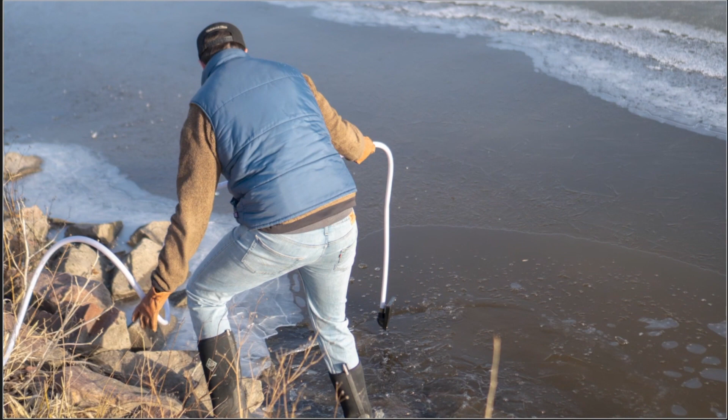Water testing is a big goal of ours, so we work with the state of South Dakota to actually test water and collect samples to help provide data to see what's wrong with the river and how we can fix it. We also want to be an educational resource, bringing awareness to the community about what's happened to the river and what we can do together to fix it.

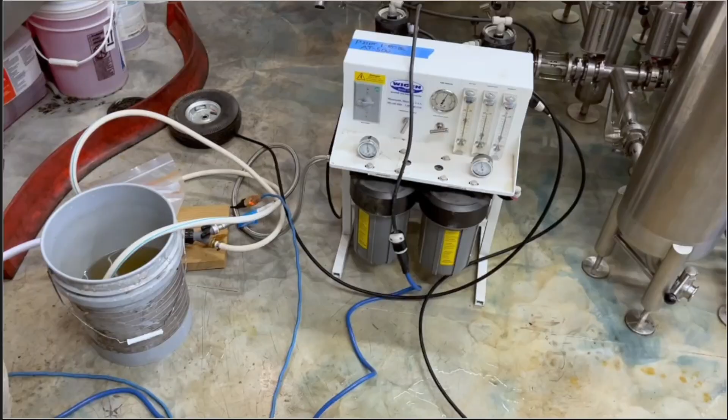We've been working with local breweries to use Big Sioux River surface water, clean it, and brew with that cleaned water. What we're trying to do is showcase how water impacts everyday life and what it takes to clean the water to get it to a point where we can consume it.

I've had this dream since we opened up about wanting to brew a beer with the Big Sioux River water. One of the things we're concerned about as a brewery is access to clean, potable water in the future. And I think everybody, because of technology and how easy it is for us to just turn on a tap and typically have clean water, we just think that that happens.

People are kind of removed from what actually goes into cleaning that up. So for us, that combination where we both had the same goal about raising awareness about keeping water and access to water clean, it was a no-brainer.

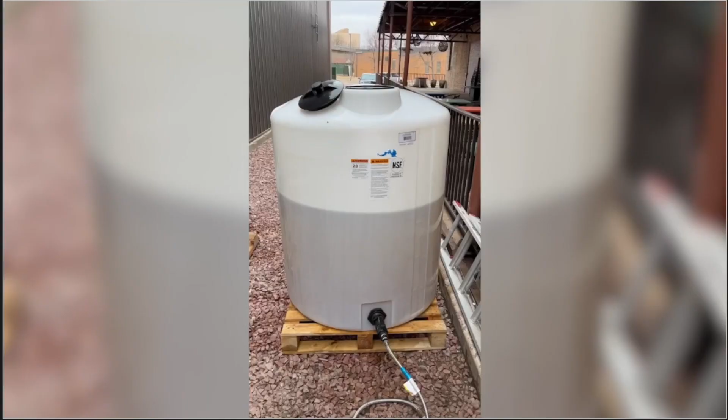Really, the goal of Big Sioux Brew was to shock and awe everyone. If you imagine getting a beer and say, hey, we made this beer out of Big Sioux River water, the first instinct is for you to go, ew, no. We want that reaction. We want everybody to say, oh my gosh, and then react.

That means that we're going to be talking about the river. We're going to talk about water quality. So that's really the main goal of Big Sioux Brew, which has really been successful.

Getting involved with Friends of the Big Sioux River, there are multiple opportunities available. We do cleanup events throughout the summer months, out there picking up trash along the banks of the Big Sioux River. A lot of the community loves this way of giving back to the river because you get down into the muck and pull out trash, and you can physically see what you're taking out.

In addition to that, we do water testing throughout the year, so volunteers wanting to help out are welcome. But at the end of the day, a lot of our actions are grassroots. Really starting to bring that conversation to the elected officials, to decision makers, to business owners, to really move that momentum forward, because this is an important process, an important resource in our community that's worth protecting.

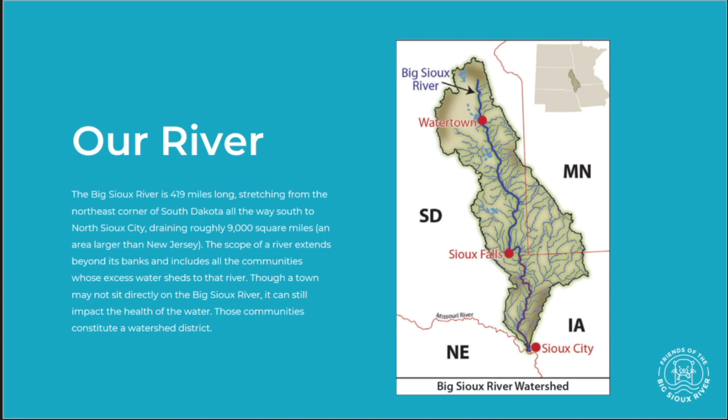Moving on to water testing, Travis alluded to this a little bit. One of our major goals for this organization is to make sure that we're using fact-based information so that we understand what the problem is, so that we can get a better solution on how to fix the problem and work with partners and the community on how to move in that direction.

One of the things we do here at Friends of the Big Sioux is a lot of water testing along that watershed. What are we testing for? Well, we're testing for three primary components: E. coli, total suspended solids, and nitrates. We'll talk a little more about those later in the program, but those are the three things we're testing.

We collect nearly over 500 samples throughout the watershed during the spring and summer months. It's important that we're spanning over 100 miles, from Dell Rapids all the way down to Akron, going out there by Lake Alvin, all those great places.

If anybody's interested in running that route, it's a really fun summer program to do, to go collect those water samples. And I say this every year, but I was out at Lake Alvin and found a 12-pack of Busch Light unopened. So, that was going to the same 12-pack of Busch Light. I'm not promising it happens every time, but at least once, I'm sure it will.

Moving on, we do a lot of water testing, and it's really important. We follow the South Dakota Volunteer Water Quality Monitoring Program because we want all of our data to get incorporated with the rest of the data that the state of South Dakota is pulling together. The reason that's important is the more data we have, the more we can make good, educated decisions as to whether or not we're improving, or if something is going awry related to the water and the river specifically.

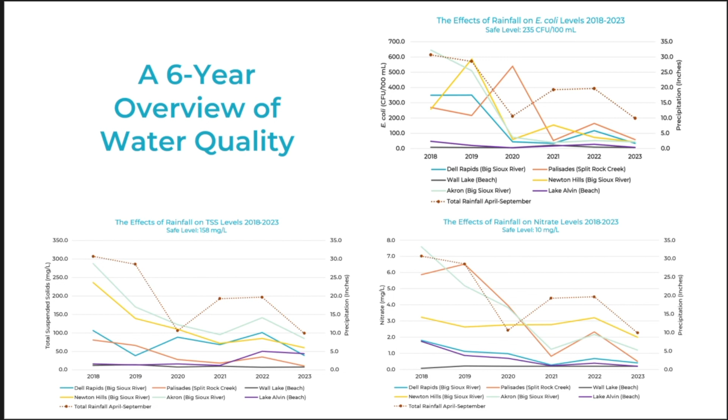Awesome. So let's do a little bit of education—there's a small test afterwards. I hope you guys all brought your number 2 pencils. It's just maybe 75, 80 questions or something like that.

But we're going to talk about impairment status. A lot of times, like we talked about a little bit in the video, one of my favorite things is to go talk to people about the Big Sioux, and you always get that immediate reaction: ew, it's a gross river, there's something wrong, it's toxic. You hear that a lot. Well, let's make sure we're educated on what we're doing here.

The integrated report for surface water quality is a very thorough report produced every 2 years by the South Dakota Department of Ag and Natural Resources. It's a statewide water quality assessment of all the lakes and streams in South Dakota, and at that point, they're looking at designated beneficial use standards.

The EPA requires all states to specify goals and expectations for how each water body is being used. That makes sense, right? If we're going to swim in the water, it should have a specific water quality that it needs to hit. If we're using that water to feed animals or irrigate fields, those are different water quality standards that we have to hit.

For example, if it's a domestic water supply, which the Big Sioux River is in some pieces of it, immersion recreation, limited contact recreation, fish life propagation - any of those things that we want to use the river for - there are certain water quality standards that we want to hit for that.

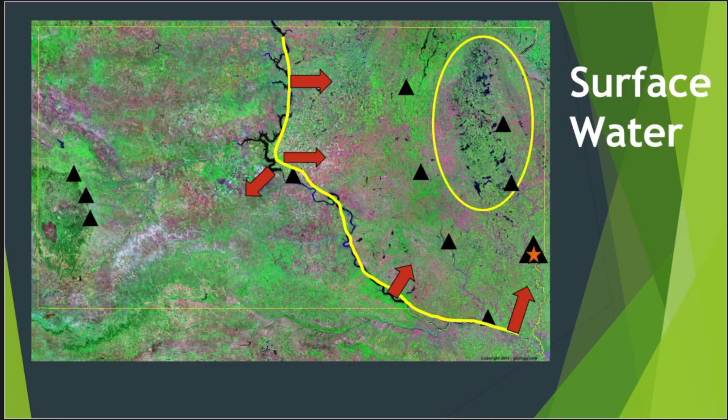Prior to the advent of Lewis and Clark, about 11 years ago, it was part of a two-legged stool — the river or the shallow aquifers in the area along the river and along Skunk Creek. Now we draw from all three. But the river is the least used resource. It's currently providing the least amount of water to the system, but it's still necessary and important because the others aren't going to get any bigger anytime soon.

Groundwater in South Dakota — the geologist gave me 28 slides. No, there are a lot of slides. I'm going to go through this real quick.

Basically, east of the river, it's glacial sand and gravel that hold the water. They're hard to find, and we spend a lot of time looking for them. If you go west of the river, into the Black Hills area and everywhere in between, the aquifers are basically big flat layers of rock that, if you know where you are relative to them, it's very easy to figure out how far down you have to drill. What you get isn't always the greatest stuff, but it works out pretty well. In the glaciated areas, the stuff is scattered all over the place, and we have to spend a lot of time looking for it and trying to suss out where it might be.

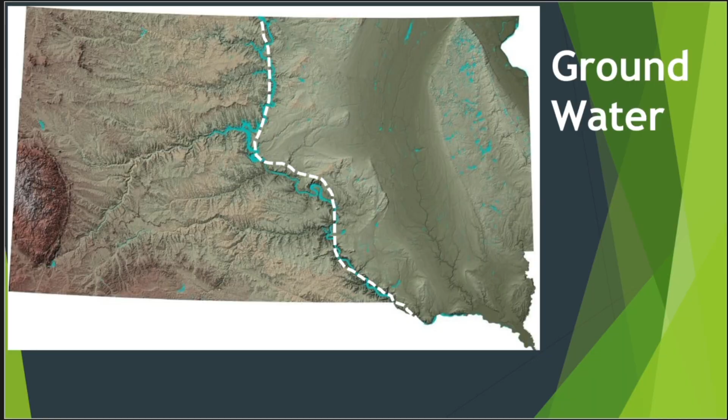I've got an image later on — I just gave this little speech here. This is the West River stuff. Most everything is layers, so if you know your elevation and the elevation of the target, you can drill a hole X number of feet deep, and 99 times out of 100 you're going to hit it.

Around the hills, a lot of that water's not bad. You get away from the hills, and it's been in the ground a very long time — it's picked up a lot of stuff, and it's yuck. That's a geology term. This is a dated picture, because the flaming fountain in Pierre was flaming at this time — that's the infamous flaming fountain there in Pierre, a well in the Dakota Formation.

In addition to having water pouring out of the ground, it's under artesian head conditions. It was full of natural gas and actually heated the capitol for a number of years. It appears that we finally depleted the gas supply, and this well is in the process of being decommissioned because it's an absolute nightmare from a safety standpoint.

The water in the ground is wet, that's about all you can say for it. And if you have nothing else, there are Dakota artesian wells all the way, pushing almost to the I-29 corridor. Because if there wasn't anything else, everybody knew if you drill down deep enough, you get the artesian and up it'll come and you make do.

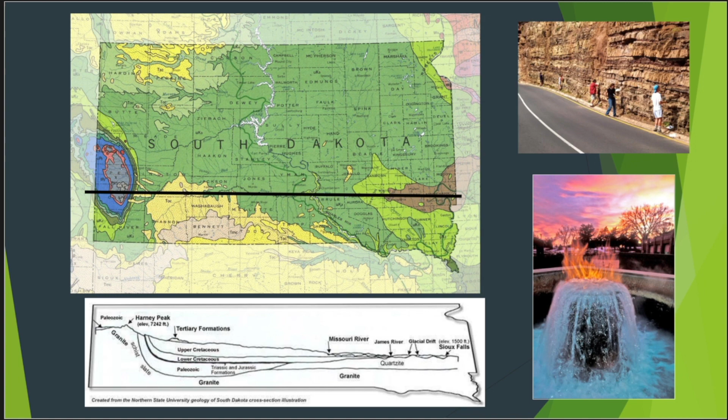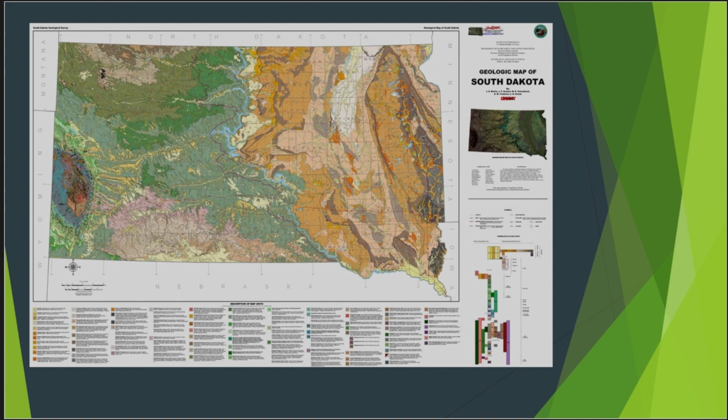As I said, eastern side of the state, our side of the Missouri River, all the oranges and different colors, those are the glacial sediments. We like to draw a lot of different maps and use different colors, so it's real busy that way. Most of the water sits in what we call glacial outwash, sands and gravel deposits left behind when the glaciers retreated during their numerous visits to South Dakota over the various years.

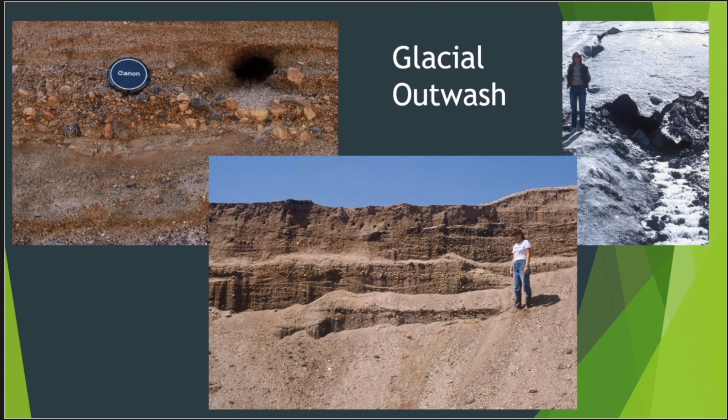You can put a lot of water in the spaces between the little pebbles and sand grains, and that's what we've got. As I mentioned earlier, though, they don't follow any kind of a pattern unless you've been looking for them a very long time, and then I'm only slightly better than anybody in the room at predicting where they're going to be. And so what we end up doing is having to go out and drill holes, lots and lots and lots of holes.

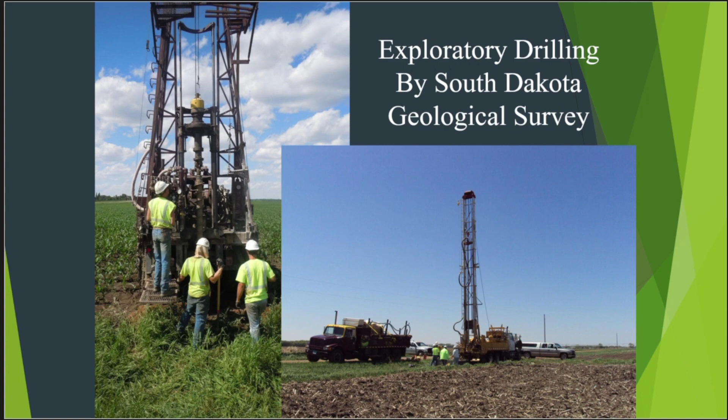It's easy to see the stuff on the surface because it's on the surface. We've got up to 1,000 feet of glacial sediment in some places in the state. We have no idea what's down there until we drill holes. And these are some of the holes being drilled. And there's a map of the whole list from just 4 years ago.

There's a lot of teeny little green dots. And hopefully what you may pick out is that a lot of them, particularly on the eastern side of the river, well really everywhere, are in a regular grid, right? North, south, east, west lines. That was intentional. These were holes drilled to find out what is down there, systematically going around, punching a hole, then punching another hole on a grid. We weren't looking for anything in particular, we wanted to find whatever was down there.

And so we've actually got a tremendous database of what's going on. Of course, when I get a request for information about a particular spot, the nearest hole is 2 miles that way and 3 miles over there. That's just the way it works. We could always do more. What that has led to, for certainly much of eastern South Dakota, where we can just take an initial shot, are maps that provide information on where aquifers might be.

This is the map called the First Occurrence Map for Minnehaha County. Any of the colored shaded areas, the oranges and the yellows, are surficial sands and gravels. Yellow's alluvium, the outwash is more of the orange. You can follow the Big Sioux River down around, loops through Sioux Falls, drops out to Brandon, and heads farther south.

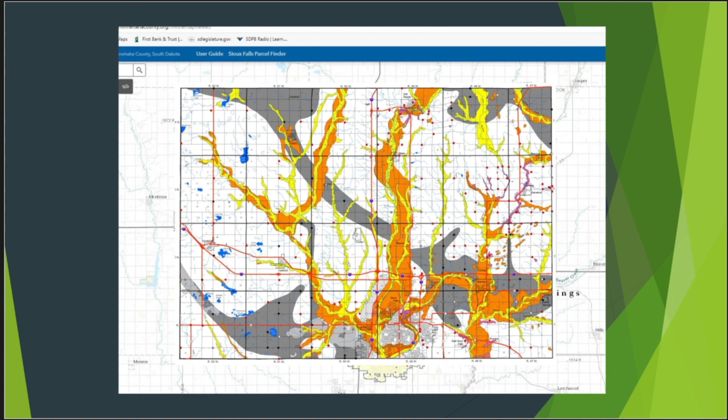The gray colored units are buried aquifer materials. They're not exposed at the surface, but they've been identified through all that systematic drilling and poking around. And the areas in white are ones where there's basically nothing in the first 100 feet. And in Minnehaha County, there aren't many places where if you go over 100 feet, you aren't going to hit quartzite. And the quartzite is kind of a mixed bag as far as aquifers go. But this is at least an effort to look at what's going on and see what's out there.

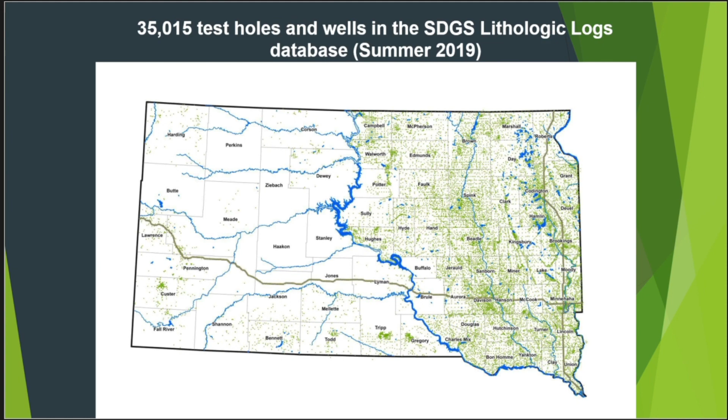Think of your city water distribution system. They've got a single source and run pipes to every house. These were folks that would set up and identify a well field somewhere and run pipes to all the farms in the county or a multi-county area. So instead of having 20 or 100 feet between homes, you might have a mile, but there you go. Take the water from where it is, ship it off to where people want it.

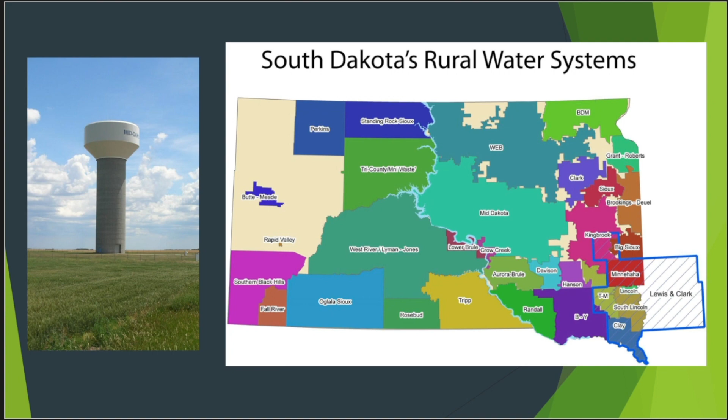These systems have built out, and down here in the lower corner, the hatched area is the rough service area for the Lewis and Clark pipeline, which I'm not going to talk about because that's a story for another time. Now, what's coming or what's here already? We have gone from little farms and little towns and single houses to big, giant farms and big business and tremendous demand.

Ethanol plants or similar ag processing facilities - let's obviously put this together. Wholestone is still a potential thing here in Sioux Falls, along with big developments. Sioux Falls doesn't add 20 people a year, they add 5,000. That's a new legislative district every 4 years. That's a lot of demand - the likes of which, again, we don't have little beaches, we have water parks. Demand at a level we have not ever seen before, and frankly aren't really prepared to deal with at this point in time.

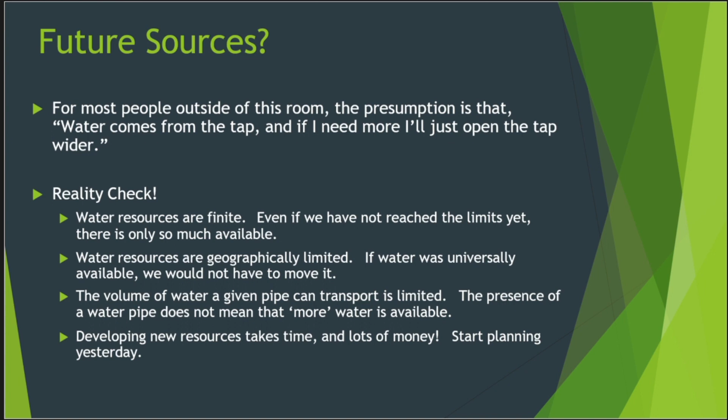First up, what do we need to protect what we have? Up and down the Big Sioux River Basin, local county governments - Minnehaha, Lincoln, Union, Moody, Lake, Brookings, a whole bunch - have all adopted what fall under various names as groundwater protection ordinances. Our surface water, the aquifers that we use, are at land surface for the most part. So if something happens at land surface that's bad for the water, it's in the water.

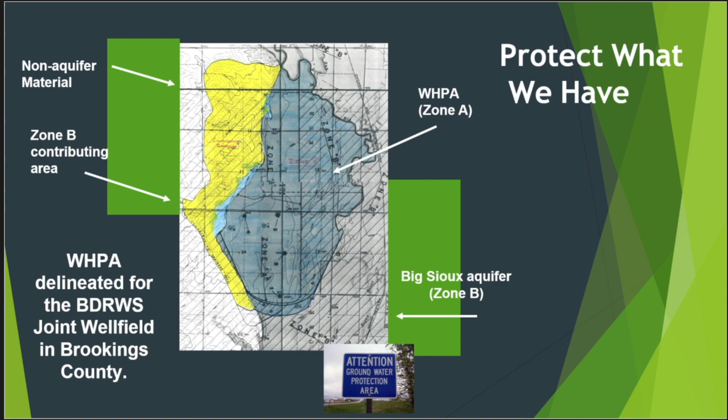And that's really critical because that's where our water is coming from. In recognition of this, there are land use limits in place from Summit all the way down to Cook Lake that limit what can be done over the shallow aquifer. These have been in place since the early 90s, for the most part 1989 - Brookings County did it first. This is huge, not something you can find in many places around the country, and it makes a big difference.

In most counties - this is a little chunk of Deuel County to the north - the shallow aquifer is any of the stuff that's colored in yellow. There's an awful lot of not-yellow, not-colored area in Deuel County. If you need to do something that's not necessarily safe, there are lots of places you can do that, that aren't over the aquifer. You know, want to build a new chemical processing plant, pick a spot in the white somewhere and you're fine. You're not going to hurt anybody, at least as far as shallow aquifers are concerned.

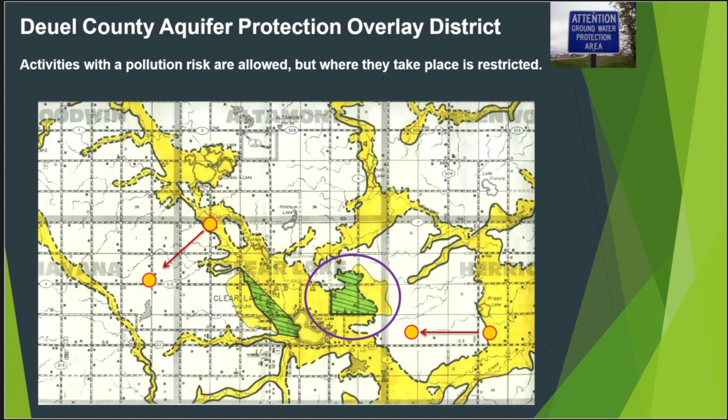It was pretty clear that that green hatched area there, surrounded by the circle - if you do not have your own well in Deuel County, that is where your water comes from. That is the sole source of publicly supplied water in the whole of Deuel County. There is no place in Deuel County you want to spend more time protecting than that. The flip side is, you can pretty much let everything else go to hell.

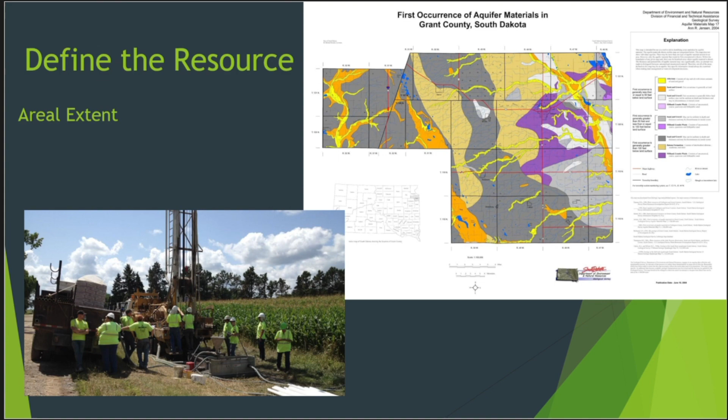So, protection - we need to do a better job of finding the resource. Even with 35,000 little green dots on that map, we need to know more. We need to get out there, and we need to refine some of the lines on these maps to a greater degree. This goes for water quantity as well - get a better handle on that.

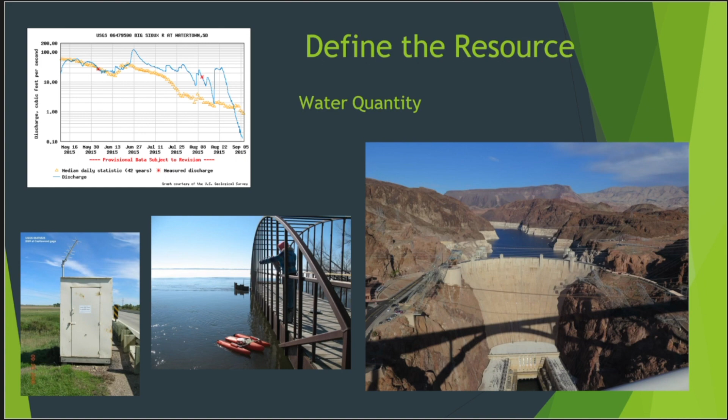Water quality - Rachel and Emily mentioned ongoing efforts to monitor water quality, both surface water and groundwater, underway and conducted by the state, by Friends of the Big Sioux, by my organization, to get a better handle on what's out there, what the problems might be, and what we can do to protect it.

Oh, I did not come through at all. Well, we'll skip that one.

There's a huge network of surface water monitoring sites, and a network of about 150 monitoring wells that look at groundwater resources across the state. For some reason, this image didn't translate very well in the PDF version, so we'll have to fix that and show it to you later. But anyway, there's a lot of information going on there as well.

Directed development is another option that probably needs to be pursued. Unfortunately, everybody wants to come live in Sioux Falls, so they want to have their business in Sioux Falls, and they want to have a zillion gallons of water. And nobody wants to be told to move to Chamberlain for some reason, for the water.

Obviously, the spot I'm standing on here, where should we go? Death Valley, yeah, up there. Not if you're a water-intensive business—this is a really bad place to be.

Now everybody laughs, but you'd be surprised how many times somebody's come in and said, yeah, we drilled a well and didn't find anything. Oh well, okay, you've got to move so many miles away, and there probably might be a well there. How about we move 200 feet?

They'd already built the building, which was going to hold a giant fish tank to grow tilapia, the little fish. What do you need to grow fish? Water. Did they have water? No—building in Death Valley. Let's avoid that if we can.

Again, you've got a bit of an aquifer map. If you're going to build up in Grant County, the darker colors tend to mean less water. Let's build there if we want to stay away from water. Go to the lighter, warmer colors if you need water. Don't just pick the spot that works best for some other reason.

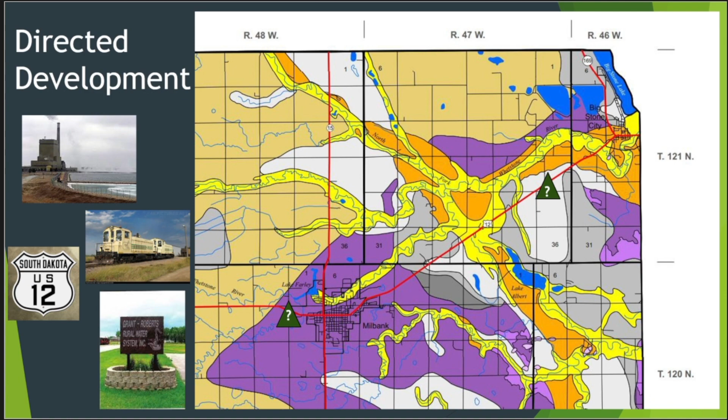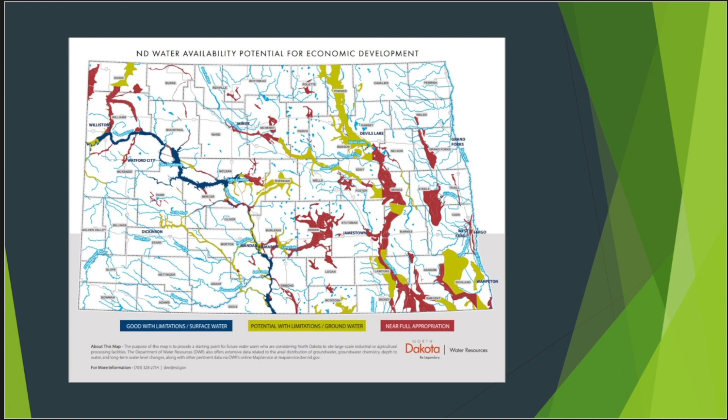North Dakota has done a little bit of work in this regard. The colors on the map basically show: if it's green or blue, there's plenty of water available. If it's yellow, it's kind of limited. And red is like, yeah, no, don't bother—there's nothing there left over. We can put some maps like this together for South Dakota.

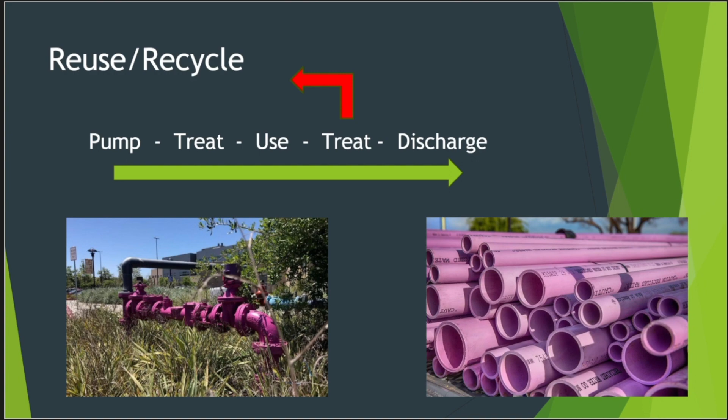New addition—we can reuse our water. It doesn't necessarily have to be cleaned right back to Perrier-level distilled water cleanliness for certain activities. This is actually something that Mark Potter, the Public Works Director, mentioned to me the other day.

They could send some of that mostly clean water across the interstate and water the grass rather than pump treated water for that use. It doesn't work for everything, but it's a way to lessen the demand on new water.

If you can recycle, thought I had a—no. Yeah, I'm no good at this. Yeah, but that red arrow would work.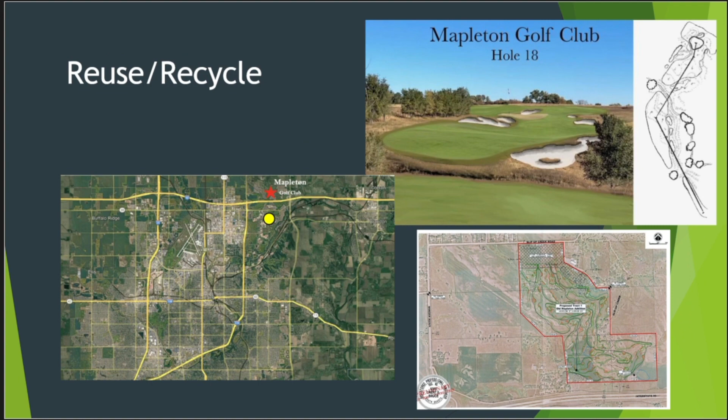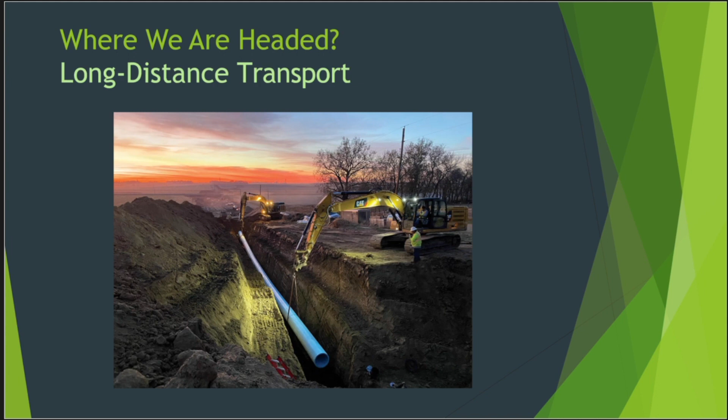Okay, lastly, those are all options that are out there and available, but in reality, where are we headed? We're headed toward this—a picture of the Lewis and Clark pipeline. It's not a Terry Redlin print, although I think it sure looked like one at the time. It's big regional long-distance transport. If you can't bring Mohammed to the mountain, you have to bring the mountain to Mohammed.

So if we need water, the only place to go look in huge quantities is the Missouri. That's where the water sits, and it's a long ways from where we are.

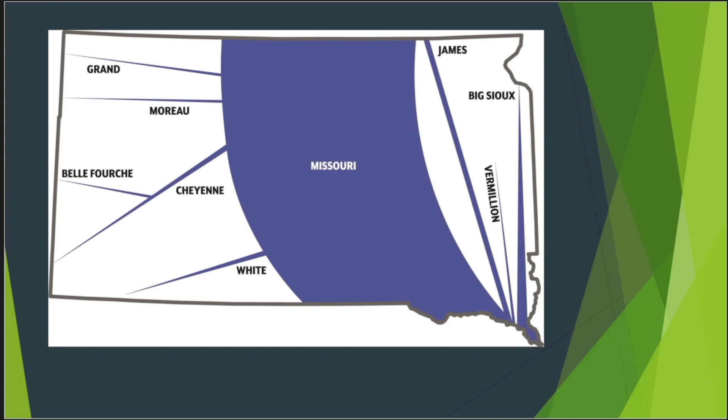There are a lot of folks already using it, but we're using a relatively modest amount. These are just the reserves that are in place. You've got Lewis and Clark semi-up to date—about 350,000 acre feet is what's really out there in terms of reservations.

By comparison, last winter, early January, down in Yankton, 14 million acre feet of water was running by the area. Everything that we have in reserve, and we have huge reserves, is barely a single-digit percentage of what's out there. There's plenty of water in the Missouri that we can tap into—we just have to figure out how to move it.

And with that, I'm going to pass it over to my colleague, Larson, who's going to talk about ways to move it. We're both going to have questions later, and he's going to do this for you.

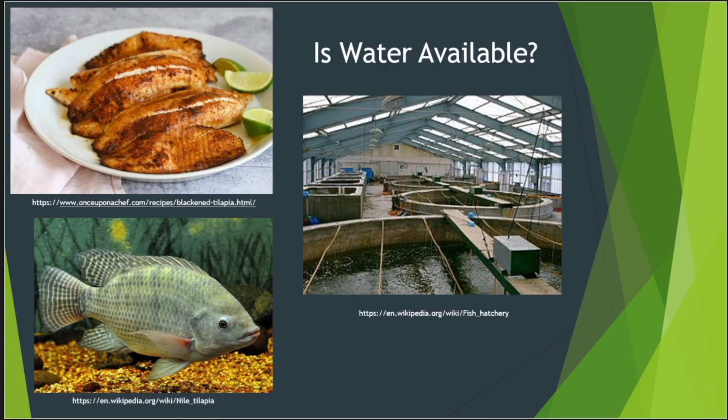Lewis and Clark Regional Water System - some of you may not have heard of this, so let me provide a little background. Lewis and Clark is a regional water system that includes 20 cities and rural water systems. All said, hey, we all are going to have future water needs. Let's join together. Instead of each of us doing our own thing, let's band together to solve our common water problems.

So in South Dakota, there are 11 members, Minnesota 4, Iowa 5. Some of our members like Tea, Harrisburg, Parker, Lennox, Beresford, Centerville, are sole source members. That means the only source of water they have is Lewis and Clark. Other members like Sioux Falls, it's a supplemental source of water. So roughly 50% of Sioux Falls' water comes from Lewis and Clark.

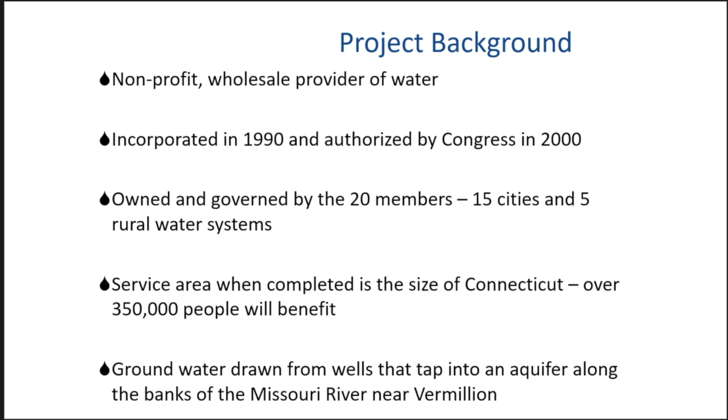Groundwater is drawn from a series of wells that tap into an aquifer along the banks of the Missouri near Vermillion. Something unique is the Bureau of Reclamation is the funding agency for Lewis and Clark. They only operate in the 17 most western states - they don't go into Minnesota and Iowa. So this is a very unique opportunity for the states of Minnesota and Iowa to benefit from a Bureau of Reclamation project.

The Bureau of Reclamation provides oversight with regard to construction, but they don't have anything to do with operation and maintenance. We are totally self-sufficient in terms of water rates covering our O&M. Construction funding is 80% federal, 10% from the 3 states, and 10% from the 20 members.

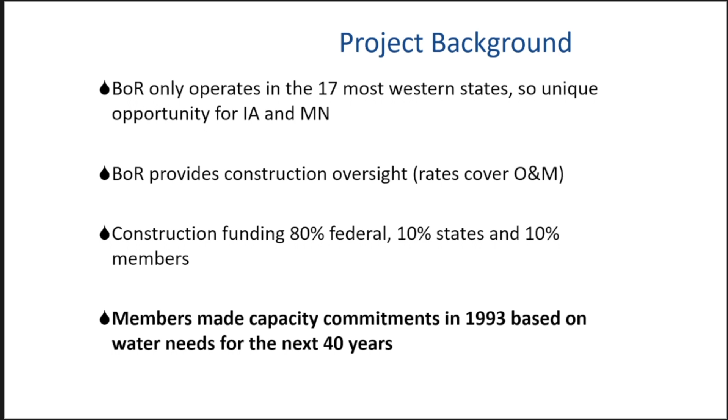This is an important point to make - the members had to make their request for water back in '93. They had to look ahead and say, for the next 40 years until 2033, what do you think you're going to need? That's what Lewis and Clark was designed for. That's important because 2033 is going to be here before you know it. So Lewis and Clark was never intended to be a 100-year solution for members.

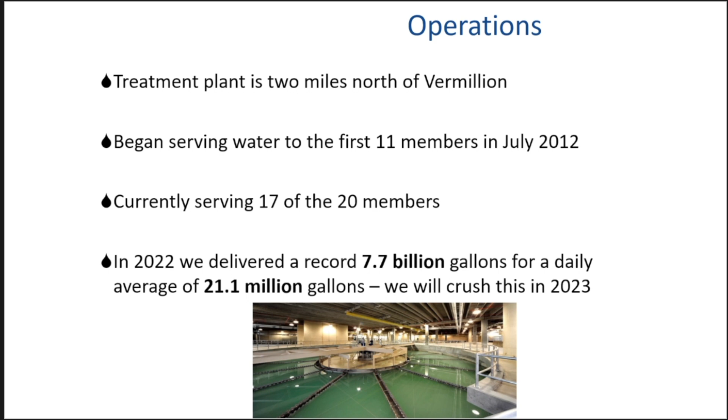In terms of operations, our treatment plant is 2 miles north of Vermillion. We began serving water to our first 11 members in July 2012. We are currently serving 17 of our 20 members. In 2022, we delivered 7.7 billion gallons, an average of 21.1 million gallons. We're going to crush that in 2023 because we've added more members, and Sioux Falls is also using Lewis and Clark to a higher degree.

In terms of construction, I want to define some terms. I'm going to use the term 'base system' a fair amount, and that is what was authorized by Congress - that's 44 million gallons, in rounding numbers. We are currently working on an expansion of the system up to 60 million gallons a day, and as Jay indicated, that's the maximum that our pipes can handle.

And then we're also looking at a possible second expansion. What do we need beyond the 60 million gallons a day? Do we need parallel pipelines? How can we address the needs for the next 40, 50 years?

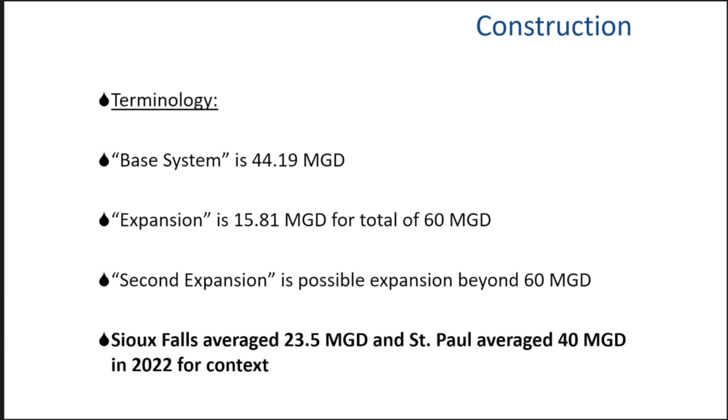Sioux Falls, just to put it in comparison or context, averaged 23.5 million gallons a day last year. St. Paul averaged 40 million gallons a day. I put that in context because if I just say 60 million gallons a day, that doesn't mean anything to you. So I'm trying to help you understand what 60 million gallons a day means compared to, for example, Sioux Falls and the city of St. Paul.

The state of South Dakota recently approved additional groundwater rights for us. We have to get groundwater rights from the state of South Dakota—it's the Missouri Elk Point Aquifer. We recently requested another water right for an additional 17 million gallons. That needs to go to the legislature this session because it exceeds 10,000 acre feet. 17 million gallons equals about 19,000 acre feet, so anything over 10,000 needs legislative approval.

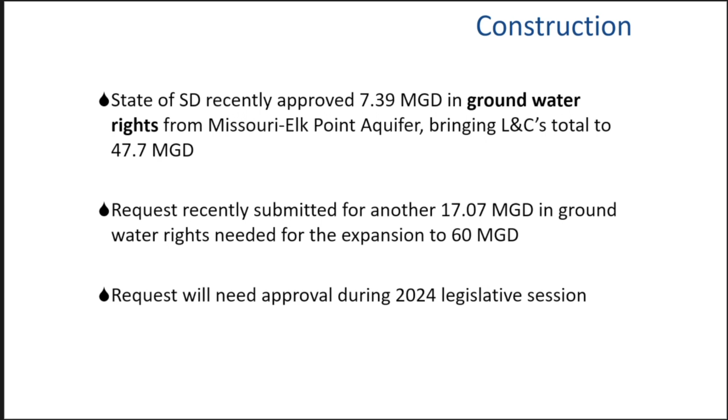Coincidentally, the last time the legislature had to act on a request like this was from Lewis and Clark in 1994. So here we are 30 years later coming back, and I'm glad Senator Jim Bolin is here—I had a chance to visit with him before the program started about this. It'll be a concurrent resolution, not even a bill, that the legislature has to give their stamp of approval on before we can get this water. Jim's been a huge supporter of Lewis and Clark through the years, and this will be his final session, so I want to give him a shout out before he retires. Jim, thanks for your service.

The base system construction started in 2004. We're 95% complete. Sheldon, Iowa is going to be connected by the end of this month. Madison in the summer of 2024. Sibley in the summer of 2025, and then we need to complete an expansion of our treatment plant. So about 2026 is when we expect the base system will be completed.

Last year, we started expanding our system. We're not even done with the base system, and we're already expanding it. Some members aren't even getting any water yet, and we're already expanding. That's primarily because of the drought. A few years ago, I would have said the expansion is 15, 20 years off, but the members saw the handwriting on the wall—not only the drought, but growth and demand far exceeding what we can provide. So we started the expansion last year.

It won't be done until 2031. And it's not like if you get half of it done, you get half the capacity—it all has to be done. So in 2031, we'll see a bump in the members' reserve capacity.

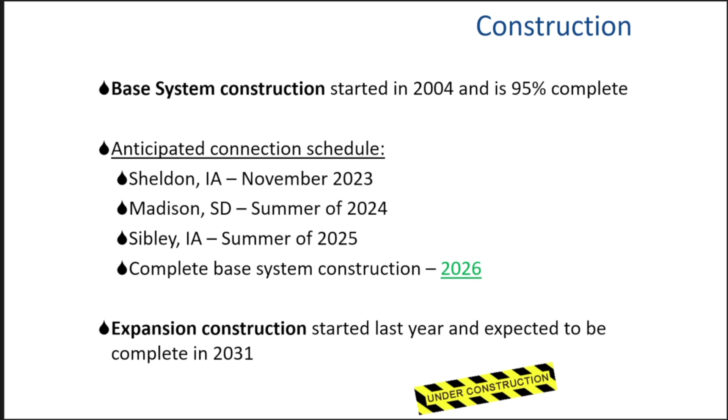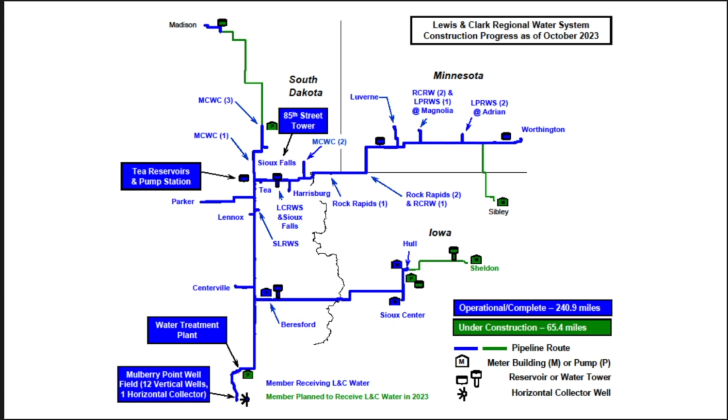This is the footprint of Lewis and Clark. Everything in blue is currently operational. Green is where we're constructing, so we're getting toward the end of the project in terms of pipeline. That's good news. Again, this is about the area the size of Connecticut, to put it in perspective.

In terms of construction, right now we have a record 18 construction contracts open, the most we've ever had. We only have 2 contracts left to complete the base system—that's the expansion of the treatment plant and a couple of backup generators. So we only have 2 left, we're getting close.

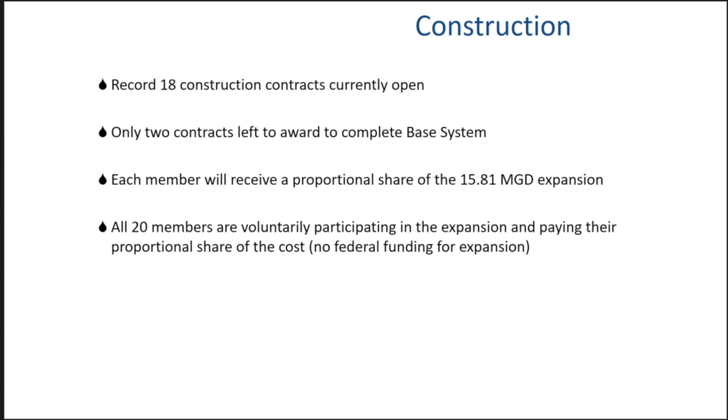Each member will receive a proportional share of that expansion. I mentioned the expansion to 60 million gallons a day—all 20 members voluntarily said that yes, we want to participate and pay for our share. There is no federal funding for the expansion. I talked about the federal funding that helped construct the base system, but there's no federal funding for the expansion.

I just want to go through some pictures here. Lime sludge is a byproduct of the treatment process—lime is used in the treatment of water, not the kind you put in a margarita, by the way. We currently have 3 lime drying beds, and we're adding 3 more. Lime, once it's dried, has many agricultural uses, so it's put on fields, etc.

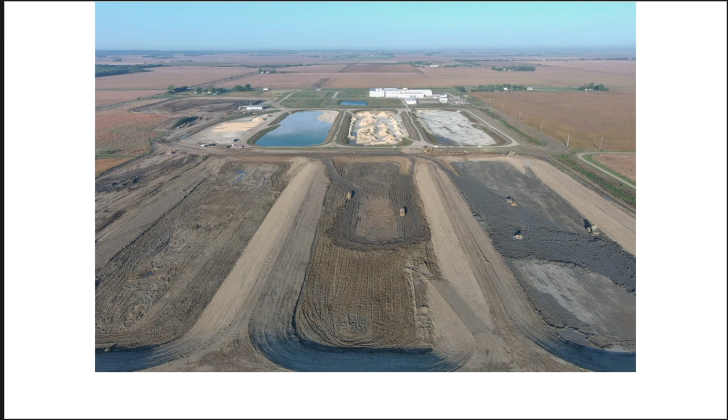Here's a picture of our treatment plant near Vermilion. Here is some of our 54-inch pipeline that went from the Missouri River up to our plant, about 9 miles of what we call raw water pipeline. This is the untreated water being brought to our plant.

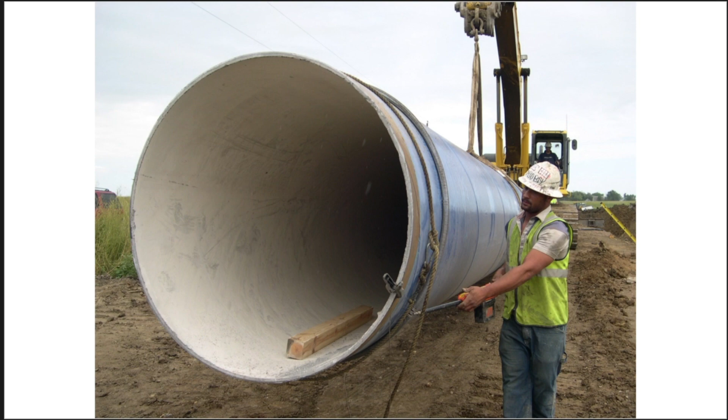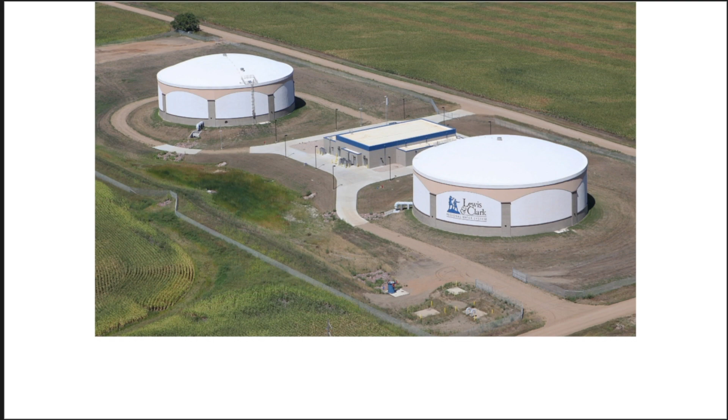Each of those reservoirs are 7.5 million gallons. We have a 3 million gallon water tower on the southern side of Sioux Falls. There's a story behind why that logo is so small. I'm not going to tell you the whole story, just to say you can't fight City Hall.

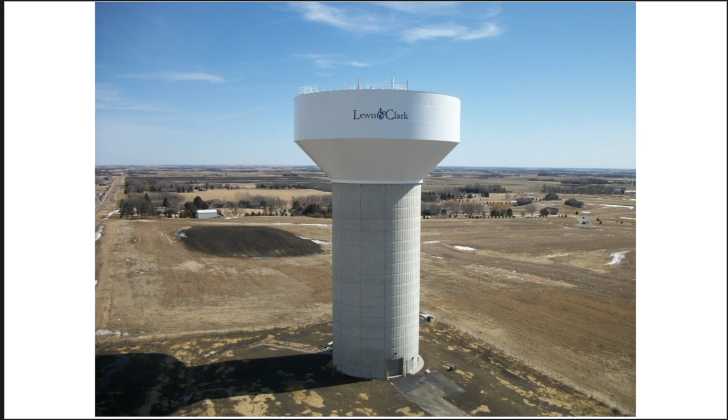In terms of funding, we need about $37 million to complete the base system. I finished this presentation a few weeks ago when I said I fully expect we're going to get that in FY24. I was a little optimistic. We're going to be about 11 million short, so we're going to have to go back to get a little more funding in FY25.

So I mentioned that the expansion is totally at the cost of the members. Thankfully, the states are helping a little bit. We are getting some ARPA funds. South Dakota, Iowa, state of Minnesota has approved some dollars to help bring down the cost of the expansion, because ultimately it's the ratepayers paying for this expansion. Everyone that buys water, you're the ones paying for this. And so we're thankful that the states came through with some money. Even so, the members still need to cover about $100 million toward that expansion to get to 60 million gallons a day. So it's a big cost.

So again, that gets us to 60 million gallons. What do we do beyond 60? Back in May of 2019, which was a record wet year - 2018 was record wet, only to be broken by 2019, even wetter - we started discussion about expanding Lewis and Clark, possibly doubling in size. The reason I point that out is this is not being driven by the drought. We were talking in a record wet year, looking at the growth demand, that we need to do something beyond 60 million gallons a day. And so we're looking at what we can do.

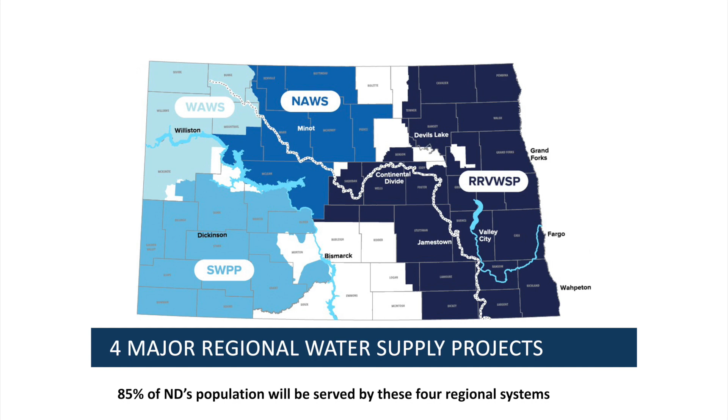But North Dakota realized long ago we need to tap into the Missouri River, and we need to take a more regionalized approach. So North Dakota is in the process of constructing 4 major regional water systems. When those are done, 85% of the entire state's population will be served by one of those 4. That's what we're trying to do, is emulate what North Dakota is doing with this regionalization approach. And we're making progress, but we have a lot of catching up to do.

So what I'm going to do, just for the sake of time, is not cover too much about Pick Sloan. I was going to share a little bit about this. I'll give you the 2-minute version. The creation of the main stem dams back in the 40s was the Pick Sloan project.

And the reason we call this Dakota Main Stem is the main stem dams, a promise of giving up all this land, was in return we were going to get all this water, mainly in the form of irrigation. And for various reasons that did not pan out. So right now, South Dakota is only getting about 5.5% of the water promised to it through Pick Sloan. There is a lot of untapped water. Lewis and Clark is a child of Pick Sloan.

So when irrigation didn't happen, the state pivoted to rural water systems. That's why you had Lewis and Clark and other projects. So we are a child of Pick Sloan, but the point is we have a lot more water that we can be tapping into, and we need to, and the answer is more regional water systems. That's the very quick version of Pick Sloan.